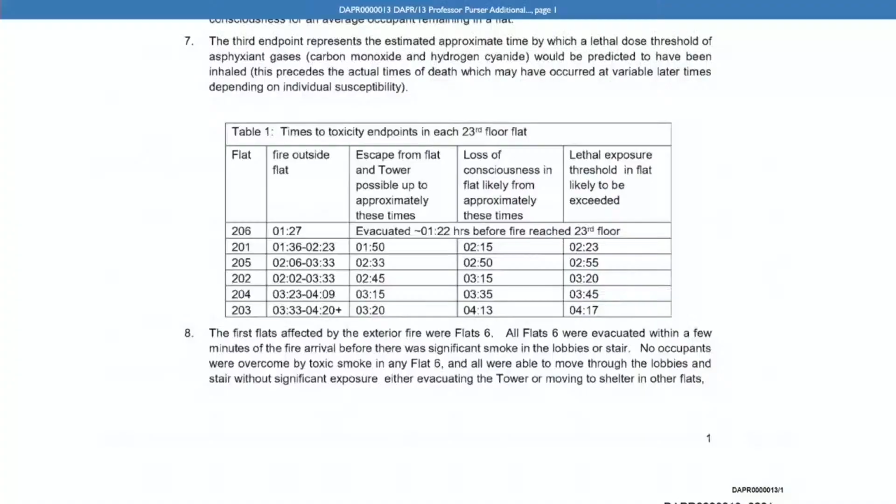I now want to ask you some specific questions about Section 6 of your report for Phase 2, where you've set out your analysis of the causes of incapacitation and death in individual cases. I'd like to begin with Floor 23. If we go to DAPR 13, we should see a table which is a summary of toxicity endpoints for each flat on floor 23, which you showed us and explained a little bit in opening your evidence yesterday. Looking at paragraphs 5 to 7, if we scroll up to paragraph 5, you'll see there that you explain the three endpoints in those three paragraphs.

Just to go through it, is it right that the first endpoint is the latest time that adult flat occupants could safely evacuate the flat? Yes. And then the second endpoint is the likely time to collapse and loss of consciousness for an average occupant in the flat? Sorry, the first endpoint was the latest time they could leave the flat and still walk down the stair, down to the ground floor without collapsing and escape from the tower.

Yep, the second endpoint, as you say in paragraph 6, is the estimated approximate likely time to collapse and loss of consciousness for an average occupant remaining in the flat. And then the third endpoint, at paragraph 7, is the estimated approximate time by which a lethal dose, a threshold of asphyxiant gases, carbon monoxide and hydrogen cyanide, would be predicted to have been inhaled. You say this precedes the actual time of death, which may have occurred at a variable time later. Yes, so that's the point where they passed the 50% threshold I discussed yesterday.

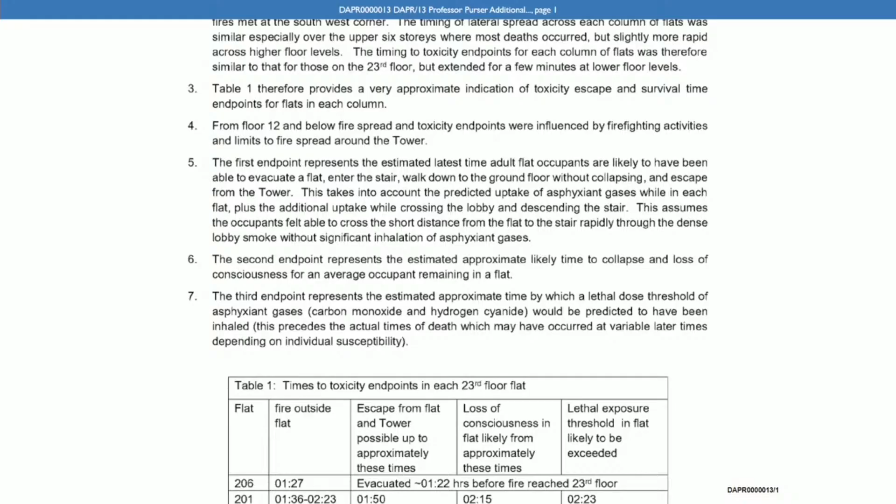Now, I'd like to start with floor 23, flat 201. You cover this at page 6 of DAPR 6. This is table 20, entitled '23rd floor occupants by flat location with summary of movements and times of escape or approximate times of death.' Correct me if I'm wrong, but you've set out each flat on each floor with each occupant in the flat, and in red type you've identified those individuals who lost their lives and the rough estimated time of death.

Now I'm going to ask you about the occupants first in 201, which you can see halfway down the screen on the right-hand side. You have a number of names: Raymond Bernard, Hamid Khani, Debbie Lamprell, Berkti Haftom, Birak Haftom, Jessica Urbano Ramirez, and Amna Idris.

You've set out your analysis for the available evidence relating to this flat from page 8 in section 6 of your report. I just want to see if I can pick through the main facts that you've referred to. Can we go to page 16 in this report? Page 16, paragraph 52, under the heading Conclusions.

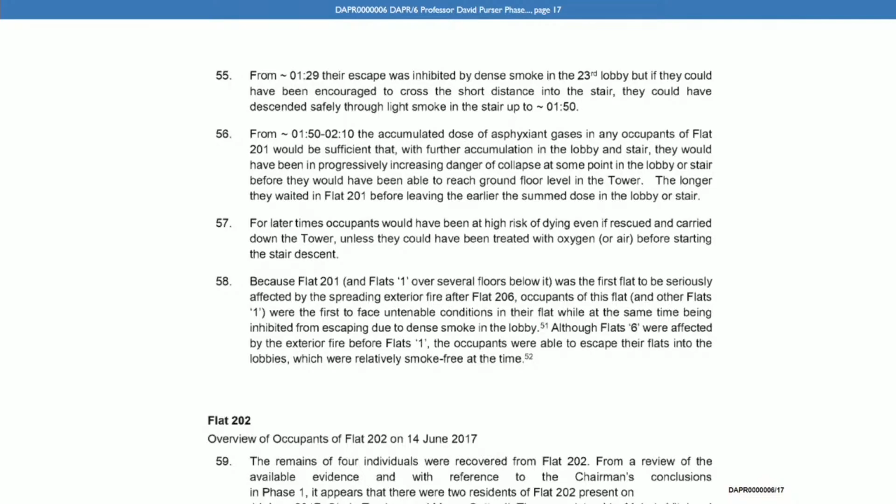Of course, but that didn't really work out very well at Grenfell. No. And then if you look at paragraph 56 at the top of the screen, you say in the last sentence, the longer they waited in flat 201 before leaving, the earlier the summed dose in the lobby or stair. Is it right that the longer the occupants remained in the flat, the greater the danger of those occupants accumulating the total summed dose?

Yes, that's right. So we're looking at the total dose, and you're building it up all the way through. So if you have a lot before you start, then once you get out, you're not going to go very far. If you leave before you've accumulated a significant dose, then you're going to be able to travel much further through whatever other conditions you meet.

Yes. And if we go back to pages 10 and 11 in this part of the report, we can just pick these points out from the paragraphs. Paragraph 23, I think you make the point that the time when Amal Ahmadin and Amaya Tuku Ahmadin left 201 is unknown, but after Fadumo Ahmed, but before about 2:12, when the accumulated exposure in flat 201 was estimated to reach a dose level predicted to cause collapse for all flat 201 occupants.

So does that tell us that Fadumo Ahmed was successful in evacuating the tower because she left earlier, but Amal Ahmadin and Amaya Tuku Ahmadin were unsuccessful because they tried to leave later? Essentially, yes. And then accumulated a dose close to causing collapse by the time they'd left the flat. As we say, we don't know precisely when they left, but it was a bit later on after Fadumo left, and we know the conditions were deteriorating quite seriously around that time. So they would have acquired a significant dose in the flat.

Yes. And just so that people can see this on the page, if we turn please to page 10, paragraph 26, you say there, the longer Amal Ahmadin and Amaya Tuku Ahmadin remained in flat 201, the greater the dose they inhaled, so that leaving any time after about 2 o'clock, they would have accumulated a significant proportion of an incapacitating dose. And then at 29, you say...

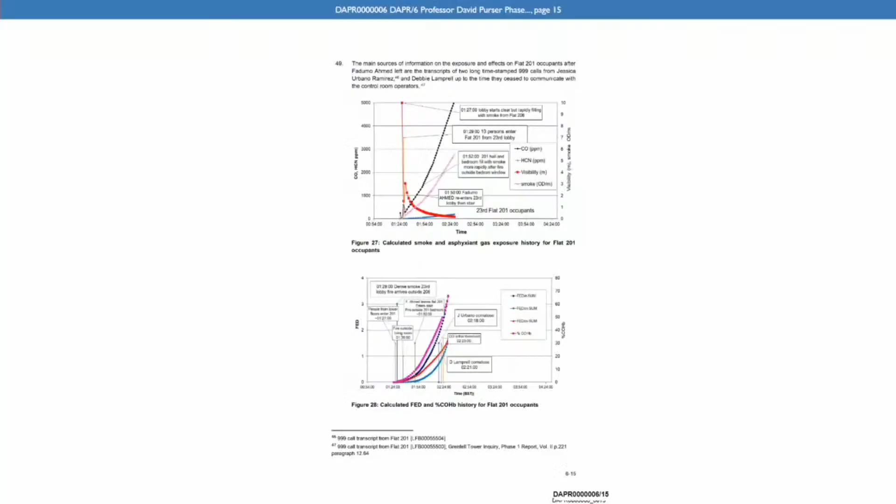If you look at figure 28, this is calculated fractional effective dose and percentage carboxyhemoglobin history for flat 201 occupants. Now, it's a complex chart, but am I right that it shows the lethal threshold for carbon monoxide reached at 2:23? Yes, approximately, about 2:23. And is it right that the occupants of flat 201 would have reached the lethal dose threshold of about 50%?

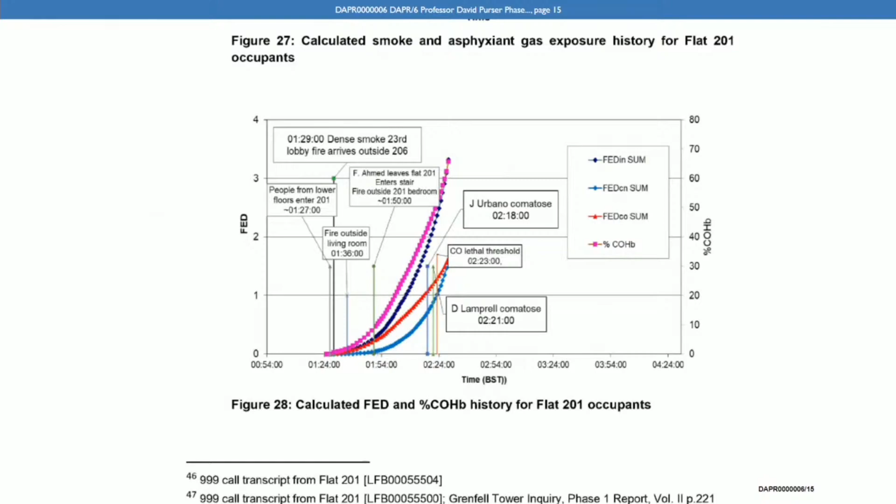Carboxyhemoglobin concentration by about 2:23? Yes. Would you estimate that the time of death of the occupants would be some time after about 2:23, therefore? Sorry, can you repeat that? Yes, would you estimate that the time of death of the occupants would be some time after about 2:23? Yes, yes. And are you able to give a specific window of time?

Right. We can give an approximate one, but as I explained yesterday, there are lots of uncertainties about the gradual slow decline once you become unconscious, and it depends on the data we have available. So for this particular case, I'm right in saying that we don't have any carboxyhemoglobin blood samples from these decedents. So we don't know whether they died at around 50% COHb or whether they went up to 90%. So it would have to be somewhere in that window.

What we do know is that, sorry, I'm thinking as I'm speaking, if that's all right. We do know that Jessica Urbano and Deborah Lamprell were on these very long 999 calls, and they became unresponsive and comatose, as you see there, at 2:18 and 2:21. So that's just before they become completely unconscious. And then shortly after that, I've estimated that they've passed the lethal threshold dose, as we just discussed, at around 2:23.

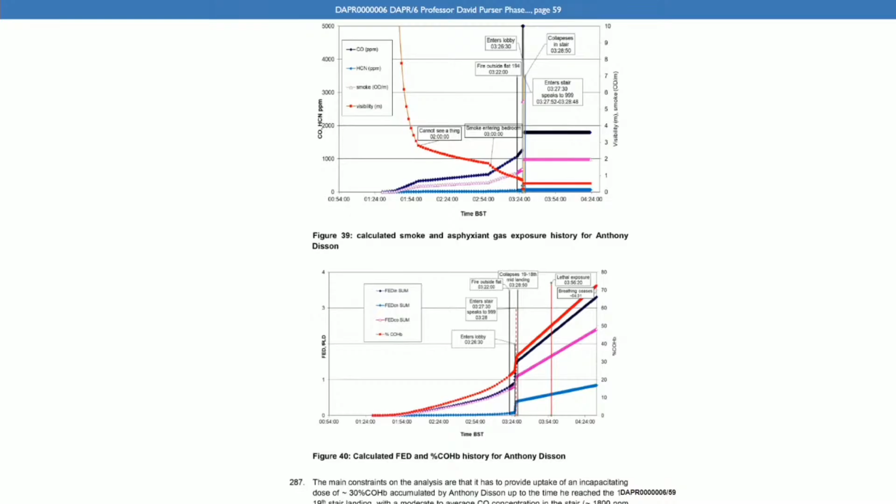Yes. I think it might be helpful also if we were to look at the floor plan chart briefly. Let's do that. MET 12593 then. Should we have that at the same time? Yes, if we can, that would be good. That's MET 12593. Page 7, we'll try page 7 first. And if we could just have that slightly enlarged. Yes, that's adequate.

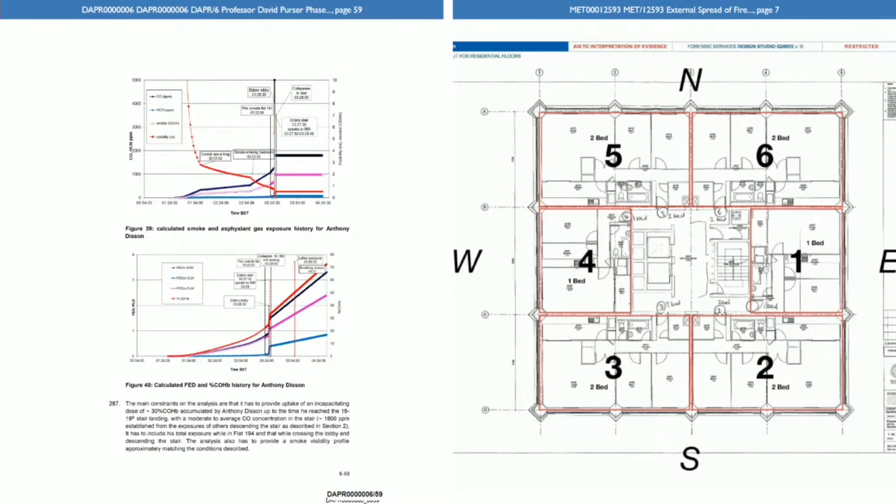So you remember I was saying yesterday that for a majority of people that I'd examined, if they left their flat where they were sheltering before or soon after the arrival of the exterior fire outside one of the rooms in their flat, and they were sheltering at that time in a different location, they really had a pretty good chance of having acquired a low dose while in the flat, and if they crossed the lobby efficiently, of making a successful descent of the stair.

So when we look at the timings for Anthony Disson, he did in fact evacuate his flat, and we have quite good data now from the 999 call in the stair. He left his flat very close to the time that the exterior fire first spread outside his flat.

So if we look at the diagram of his flat, I just wanted to point out some of these features. So obviously the fire is coming from across the west side of the tower, from the north corner. It's spread past the west face of flat 5, and it's just coming past the column there. Column B, to attack the bedroom of Disson's flat.

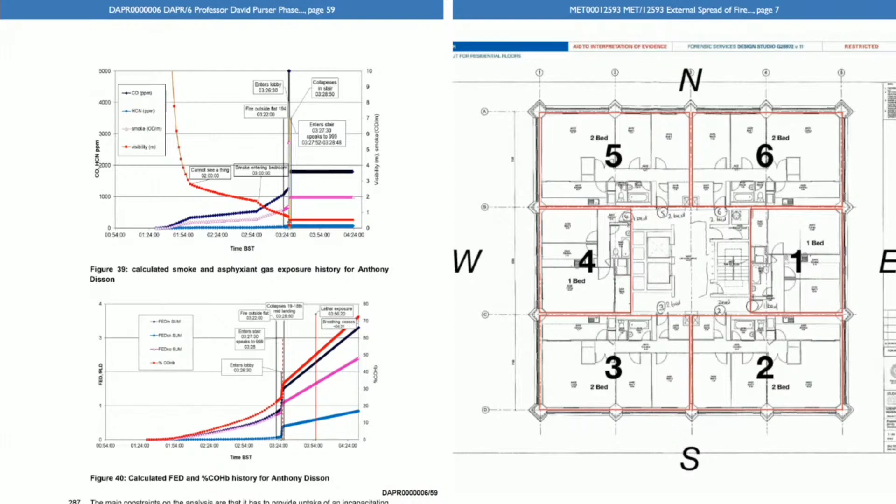Now, if we go to paragraph 295 on page 60, you say there that he inhaled a dose level of 50% carboxyhemoglobin, which represents the threshold for lethal exposure, and he'd done that by 3:56, and therefore you estimate that he died by approximately 4:31.

Just to remind me of his final dose - he died at 71%. And to confirm, you've estimated that the time of death was 4:31, very approximately.

Following prolonged exposure in the stairs, I think for more than an hour from 3:26. We get the 3:26 point higher up the page at paragraph 289. It's hard - I've rather taken this backwards, but he has 71% carboxy in his blood.

He leaves the flat at approximately 3:26 to 3:27, and then he died at approximately 4:31. Because he had to have time to breathe very slowly, breathing 1,800 parts per million in the stair for a prolonged period to have achieved the 71% at the time of death. So just to break that up into parts, at the point he enters the stair, he's obviously still mobile.

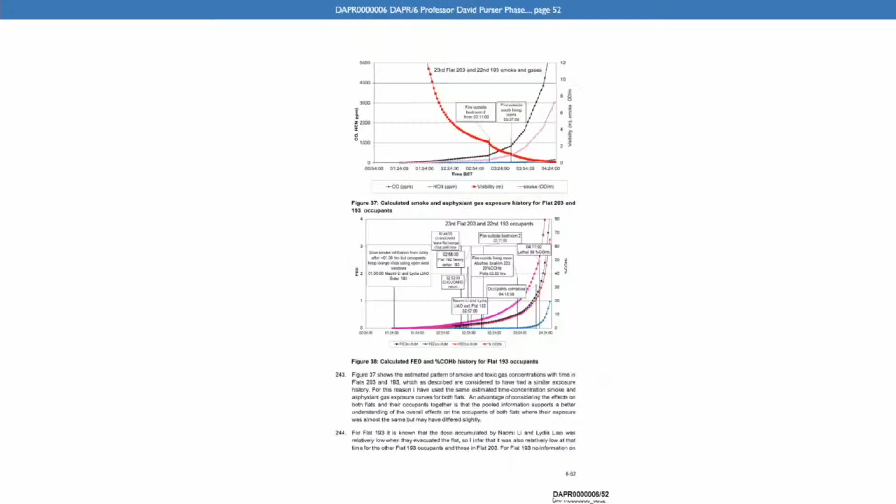If we go then, please, to page 52 in this part of the report, we have figure 38. Let's just look at that together. That shows the forward calculated uptake. Yes, it's very busy. Am I right that this is the calculated fractional effective dose and carboxyhemoglobin history for the occupants of that flat? Yes, and the one above. You've got flat 203 on floor 23 and flat 193 on floor 22.

Now, does it show that the occupants of both of those flats were likely to be comatose by 4:13? Yes. And therefore to have crossed the lethal threshold by 4:17? Yes. And I think in your conclusions, which we can find on page 54, let's have those up at the same time, please. Page 54, paragraph 254. Yes, I'll read it aloud.

You say, by around 4:17 to 4:20, the occupants are likely to have inhaled a lethal dose of asphyxiant gases. As stated, since the remains of the flat 193 occupants were located in the southwest corner of the living room, it is likely that they would have been subjected to some heat exposure after the fire reached the south side of the living room. However, due to their prolonged exposure to smoke and asphyxiant gases, it is likely that the flat occupants would have become comatose, then died from inhalation of toxic smoke and due to the inhalation of asphyxiant gases, especially carbon monoxide, with contributory effects from other toxic gases, including hydrogen cyanide.

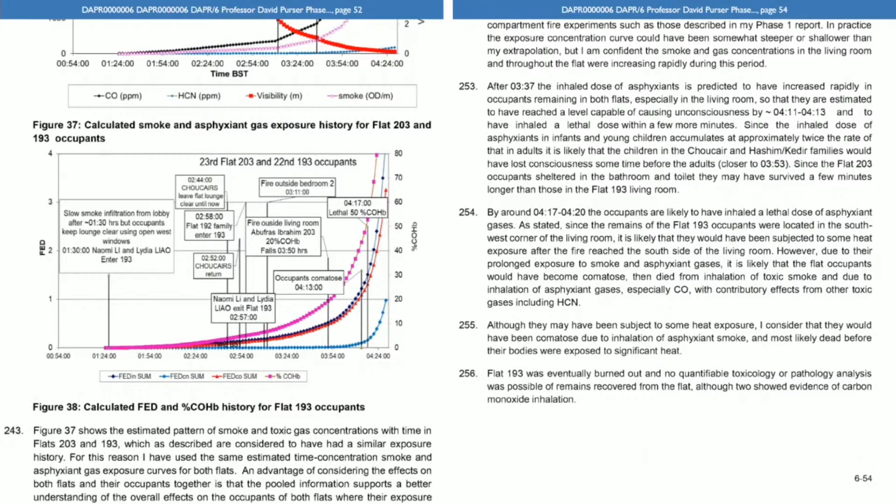Now, moving away slightly from that particular point, I'll read the reference in the record, I don't need to show it to you. There's a transcript of a call from Nadia Choucair that you've referred to, a 999 call which connects to British Telecom at 3:14, in which Nadia Choucair says, 'My daughter's unconscious, she's dying.' And the reference for that is COR 401081.

Now, the question is, taking that into account, 3:14, is it possible that the child's time of death may have been earlier than the range 4:17 to 4:20? Yes. No, I hadn't been aware of this particular call up till recently. I was in your report, I believe. I've missed that, I'm sorry. But that seems quite early to me, because we knew Lydia and Naomi had successfully left the flat at 2:57.

They'd been, of course, they're adults. And, of course, the other factor, which you may be about to raise with the Choucair family, is that they had attempted previously to escape. I'm right, aren't I, in saying that? Yes, some had, yes. So they'd left the flat earlier on, and they were gone for about 8 minutes. And so I estimate that in that 8 minutes they may have travelled down the stair several floor levels and then turned round and come back again. And then they re-entered the flat.

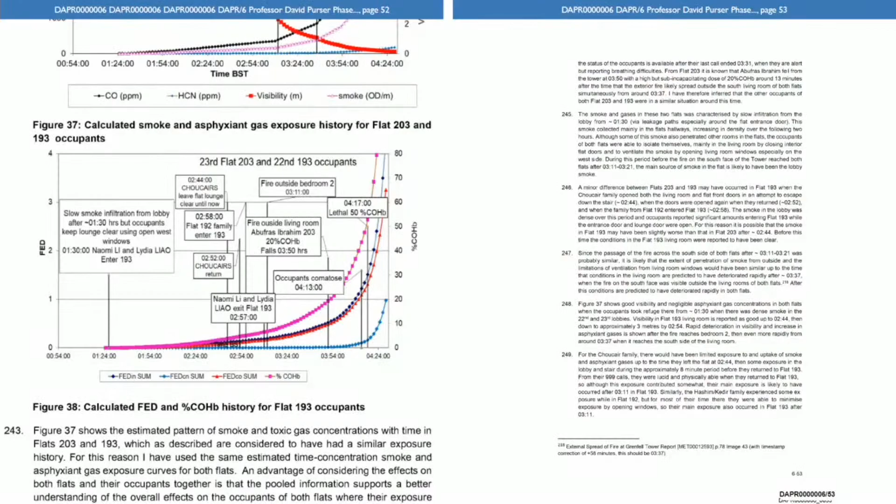Yes, thank you. There would have been limited exposure to and uptake of smoke and asphyxiant gases up to the time they left the flat at 2:44. Then some exposure in the lobby and stair during the approximate 8-minute period before they returned to flat 193. From their 999 calls, they were lucid and physically able when they returned to flat 193.

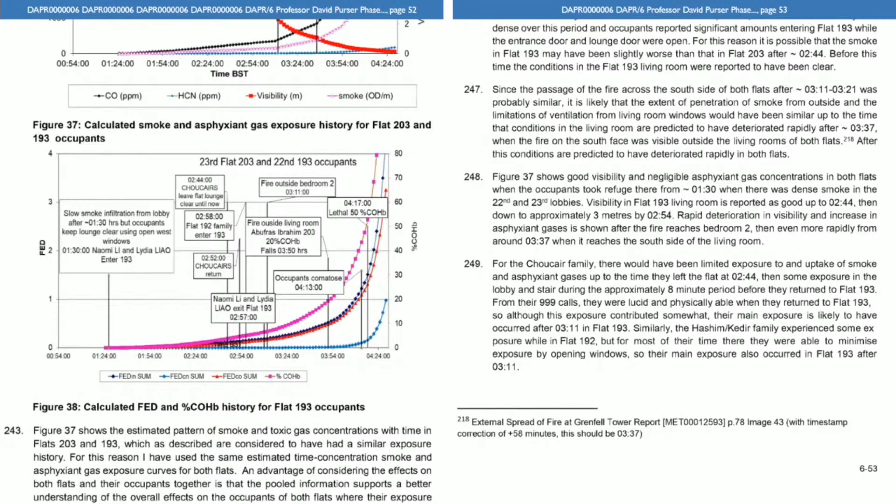So at that time, the adults were still in a good condition, but of course they had accumulated a certain preloaded dose in that activity period. And you go on to say they seem lucid and physically able on their return, and their main exposure is likely to have occurred in flat 193 itself, after 3:11. Now, my question, Professor, is would their time in the lobby have contributed to the accumulation of the fractional effective dose of carboxyhemoglobin?

Well, this is an interesting point. So we're talking about flat 203 here, aren't we? Yes, flat 3. So I would not expect them to have spent very long in the lobby because of the distance, looking at our diagram. The distance from the front door of flat 3 to the stair door is quite short. I think it was actually 6 metres.

But let's have it up so that people can see what you're explaining. MET00012593, please, page 7. Okay, so somebody's written number 3, with a circle. Yes, that's the front door of flat 3. And then just to the right of that, up a little bit, we can see the curve of the door to the stair, leading to the stair, and it's a very short distance to travel.

So I would have expected them to have spent seconds negotiating that distance, and possibly holding their breath while they did it, because we know that the conditions are bad in that lobby. So I would not have expected them to inhale a significant dose while crossing that lobby. However, in the stair, we don't know, but my understanding - I'd have to reread their witness statements again - I certainly formed the impression that they must have got into the stair, and from the 8 minutes, that would have given them time to have descended quite a number of floors, turned round and reascended in the stair, and had quite a significant exposure while in the stair. So I think that's where their main exposure would have been, in the stair.

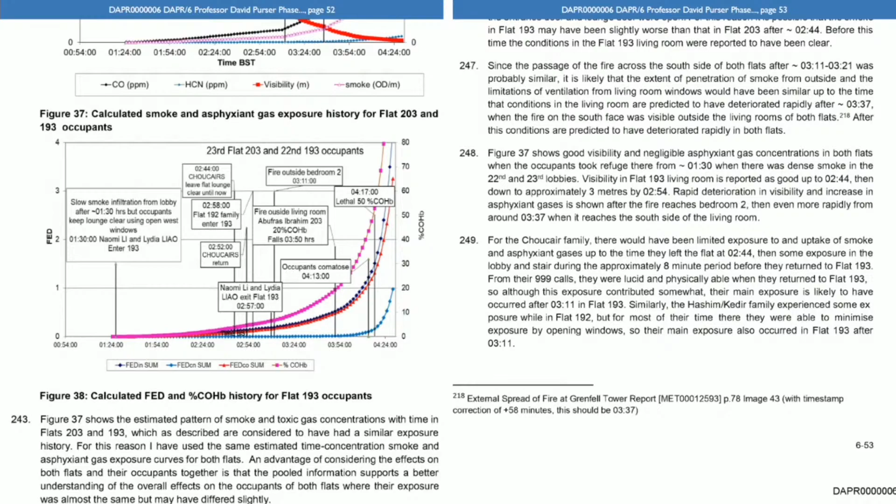Now, if we go, please, to page 43 and look at paragraph 202, and over the page to page 44, paragraph 204, it runs down that part of the page, and over the page, under the heading Analysis of Uptake of Asphyxiant Gases, and I'm summarising what you find here, you identify the conditions in the bedroom in which the Kedir family were sheltering in flat 192 deteriorated more rapidly from around 242. You say that in 202 in the middle of the paragraph.

Yes. And that the conditions would have deteriorated further at around 255 in the next sentence, yes? Yeah. And that the final roughly 15-minute period in the flat is likely resulting in them inhaling a significant dose of asphyxiants before moving to flat 193. Yes?

Where was that? Well, you find that, I think, in paragraph 202 and 203. It's a combination of the both, I think. It's hard to digest text quickly, I'm sorry. I know, and take your time. Conditions deteriorated more rapidly from 242.

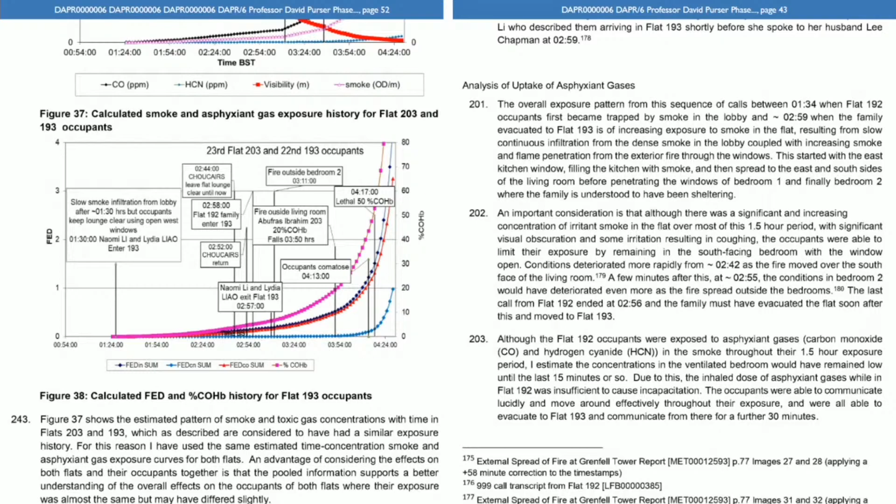I think the best place to find this, to be frank, Professor, is at the top of page 44 in paragraph 204, where you say, although the flat 192 occupants are able to evacuate the flat at about 256 to 259 and cross to flat 193, they are likely to have inhaled a significant dose of asphyxiants before leaving flat 192. Right, yes, sorry.

So as I was saying half an hour ago, there's a real issue here with these flats too. People were able to minimise their exposure for quite some time by sheltering in the bedrooms, as appears to have happened here. But it looks as if they were still in the flat after there was quite considerable spread of fire, even outside the bedrooms, from what the paragraph we've just been perusing says. So they were still very active, able to make the transition without great difficulty, in a good condition at the time, but they would have accumulated some degree of asphyxiants before they left flat 192, possibly more than Lydia and Naomi would have been doing in 193 and the Choucairs before that they did their stair.

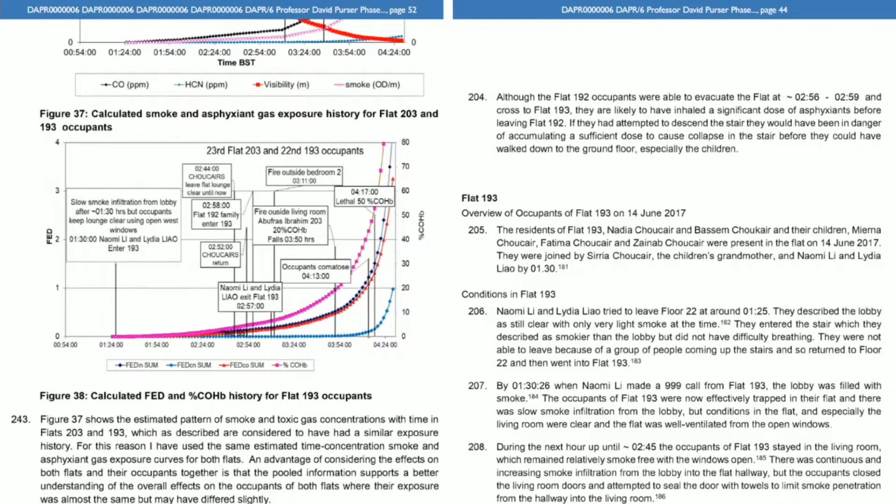Now, you say, in the next sentence, if they had attempted to descend the stair, they would have been in danger of accumulating a sufficient dose to cause collapse in the stair before they could have walked down to the ground floor, especially the children. Yes. Are you able to quantify the accumulation of asphyxiant gases and risk of collapse further than you have?

Well, it's similar to what we've been discussing yesterday, that I think from memory, the dose you're going to accumulate as you walk down the stair with 1800 ppm from a high level is something like 20 or so percent carboxyhemoglobin you're going to add to whatever you start with. And if you start with more than about 9 or 10% before you set off from your flat, then you're in danger of getting into trouble before you reach the bottom of the stair.

And from the description of the timings of fire spread and the activities of the occupants, I feel they were on the cusp of this kind of transition point, where if they'd remained much longer, they would have pre-accumulated too big a dose to allow headroom for them to have accumulated the further dose as they walked down the stair.

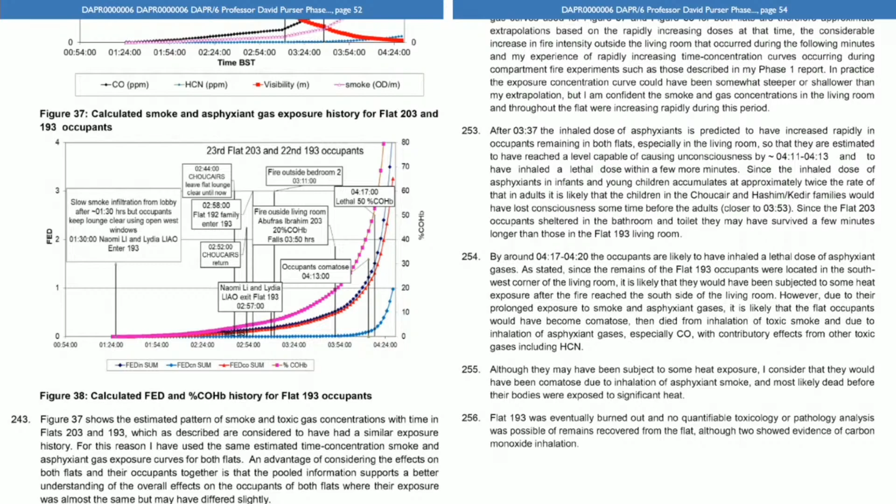Yeah, so here we're talking about the living room because we're in 193, so yes. Now, could the times of death of the children have been earlier than 4:20? If we go to table 21 and recorded here in paragraph 254, so 4:17 to 4:20, could those times for the children be earlier than that window because of their age?

Yes, I think we can estimate that there would have been a shift. I know it's difficult to quantify, but they would have expected to be earlier than the adults. If you like, the probability is that the children would succumb before the adults, be overcome before the adults.

And I can tell you the age for Zainab, because it's in the phase 1 report and therefore in the public domain, but it was 3 years old. I thought it was 3, yes. So she was probably carried when they went down the stair, but even so, she's still inhaling significant amounts of these gases.

But just to be clear, you say that it's likely that they would have died earlier than the window of 4:17 to 4:20, but you can't say how much earlier. Not really, but yes, earlier, some minutes earlier.

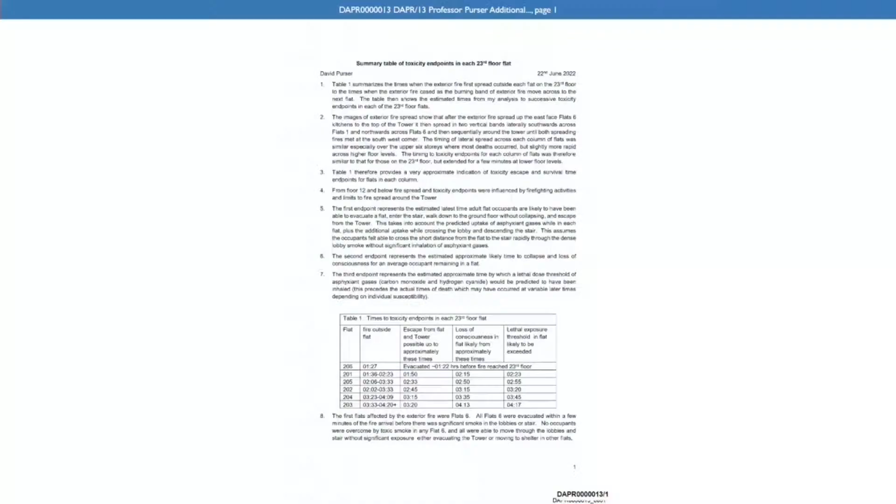There's the table. So we're talking about—well, this is for flat 202. So we're talking about flat 192, aren't we? Yes, okay, so flat 192.

And the pattern of fire spread and the timing of it at these upper floors was pretty close, with the slight caveat that as you go down, you sort of buy the odd minute or two floor by floor as you go down.

So I've got a figure there of about 2:45—that's where I got my 2:45. Yes, I think that's a good indication. Okay, so that's before the 2:58, which was the last time of the call.

Yes, so by the time of that call they're already close to unconsciousness—so that's too late by then. Yes, really. Thank you.

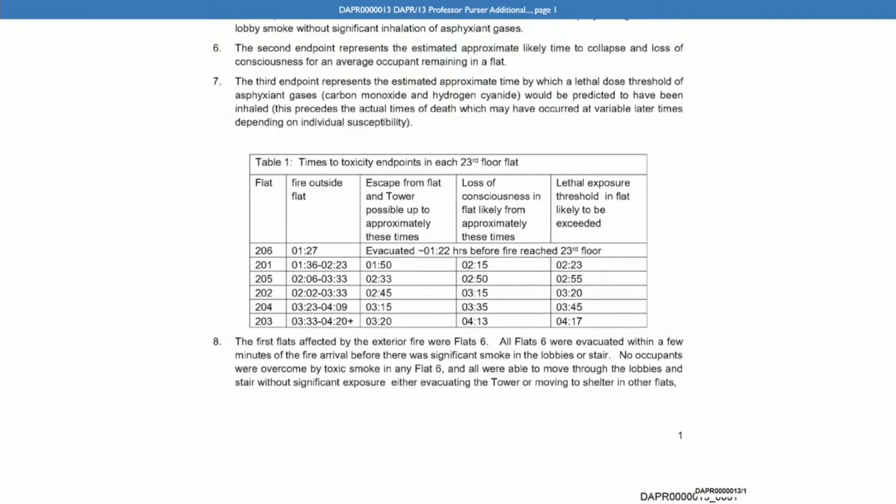Then let's go, please, to the Belkadi family in flat 175 on floor 20. For that, please, let's turn to page 88 in part 6 of your report, DAPR 606. The overview at paragraph 486 says: the Belkadi family, Omar Belkadi, Farah Hamdan, and their 3 children lived in flat 175. They were present on the night of the fire, and we can again run through the various facts which pertain to that particular family.

Is this floor 21? I think I said 20—it's 21. If you go, please, to page 91—well actually, it is floor 20, 20. I'm sorry, it is 20, it is floor 20. My fault. 20, sorry, yes, I miscorrected myself. It's floor 20.

If we go, please, to page 91—well, we can pick this up I think a bit higher up on page 88 first, which we have. You say in paragraph 487 that the family remained in flat 175 until firefighters attempted to assist their evacuation from the flat at approximately 2:19.

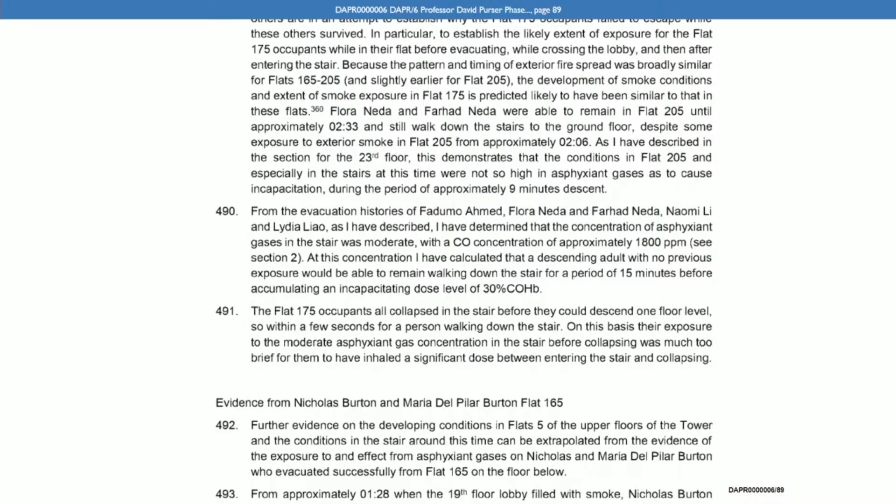If we then go, please, to page 100, and go to paragraph 545, you say there, under your conclusions, that Farah Hamdan, Lina Belkadi, Omar Belkadi, and Malak Belkadi all experienced a similar exposure to toxic smoke and asphyxiant gases sufficient to cause collapse almost as soon as they entered the stair, and then death on the stair after a further exposure. They were not exposed to significant heat while in the flat or lobby. The minor heat damage is likely to have occurred after death, before the bodies were recovered from the stairs.

They collapsed almost immediately after entering the stairs, so they had already inhaled an incapacitating dose of asphyxiant gases by this time, approximately 30 to 40% carboxyhemoglobin, while in flat 175 and the 20th floor lobby. Some of this was accumulated while in flat 175.

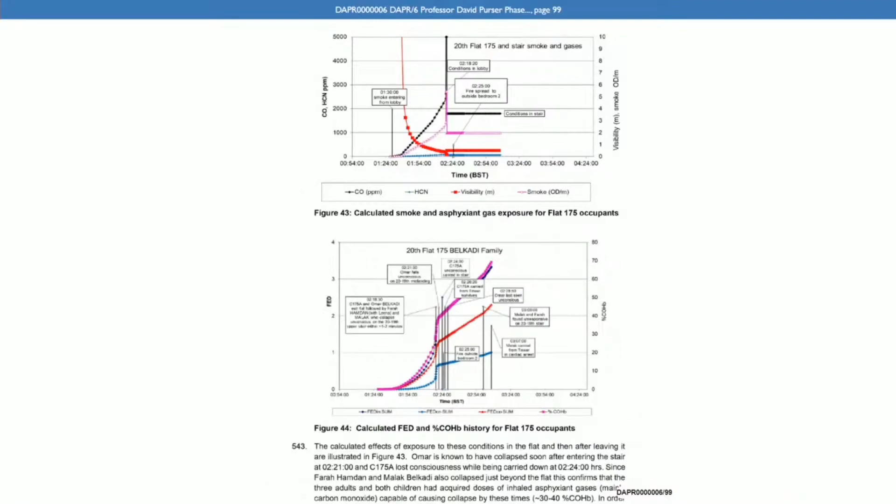Now, against that background, can I ask you to look, please, at figures 43 and 44, which we will find on the next page. Sorry, page 99, apologies, the previous page. There it is, 43 and 44, which is the calculated smoke and asphyxiant gas exposure for flat 175 occupants in 43, and in 44 the calculated FED and percentage carboxyhemoglobin history for those occupants. We may need to have those expanded a little bit so that they're clear.

Now, looking at those figures, I have a question now. Is it possible that the Belkadi/Hamdan family could have successfully evacuated flat 175 if they'd left earlier than 2:17, which is your time?

So they left at 2:19. We established that earlier, didn't we? Yes. And you're asking me - sorry, it's hard to keep up with all this. So why do you pick 2:17? Because that's the last time they called, at 2:17. And we get that from paragraph 506, which I showed you.

This Belkadi family history is really quite a complex one, as I'm sure you appreciate. We've covered a lot of ground in the last 5 minutes. I know. So it might be helpful if I just explain how I approached this. So basically what I'm saying is...

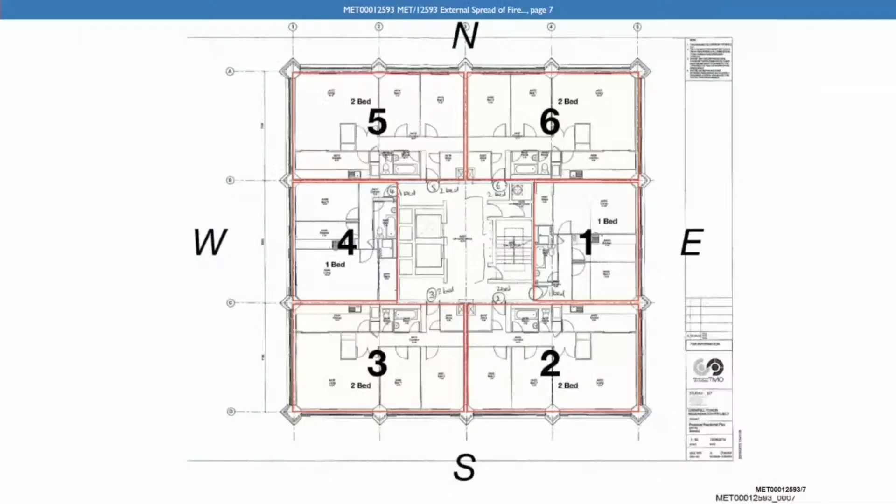Let's look at MET00012593, which we looked at before, page 7. We looked at Tony Disson's flat 194, which was a flat 4, and we looked at flat 3. We're now looking at 175, a flat 5, and I think you can identify the front door there. Is that more or less?

Does that present more or less difficulty to cross the lobby than Tony Disson's? Well, it's very similar, as you can see, because the 4 and the 5 are quite close together. I mean, the absolute distance isn't enormous, but it's a long way to go under these circumstances, and it's the complexity of the route and the danger of getting confused and lost on the way.

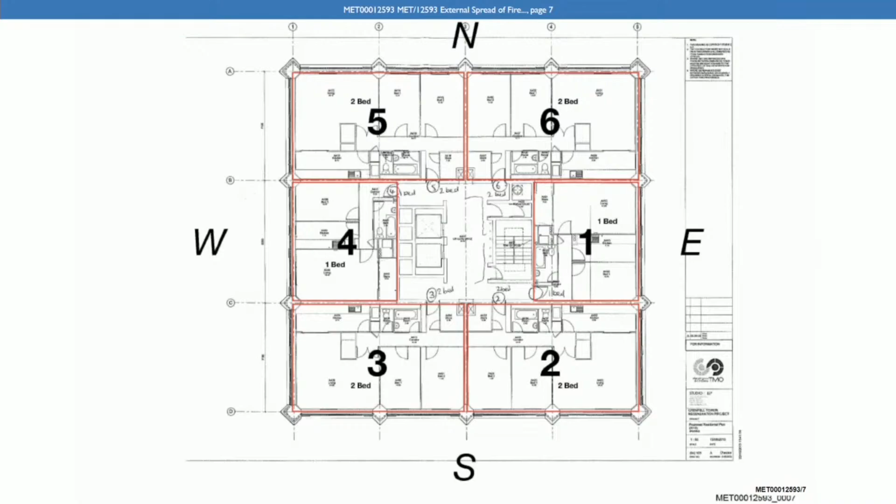Now, moving on, can we get back to your Section 6 report, please? DAPR 606, page 99, paragraph 543. You say there, in the third line, since Farah Hamdan and Malak Belkadi also collapsed just beyond the flat, this confirms that the 3 adults and both children had acquired doses of inhaled asphyxiant gases, mainly carbon monoxide, capable of causing collapse by these times, 30 to 40%.

And then you go on to say, two-thirds of the way down the paragraph, after they are all likely to have become unconscious at 1:32 - that must be a mistake. I found that yesterday. It should be 2:32, shouldn't it? Thank you, yes, that corrects that.

There would have been a slow, gradual uptake of carbon monoxide on the stair, with a slowly increasing carboxyhemoglobin, until they had exceeded the lethal threshold, about 50% carboxyhemoglobin, around 2:49, based on an estimated average 1800 ppm CO in the stair. Is that correct? Yes, that is correct.

And is that a window of time? Can you give an estimated window of time? Well, that's a point in time. So this is for the time to pass the lethal threshold. I would probably put that time fairly tightly around there. Obviously there's some uncertainty, a few minutes either way, but to get to 50%, you might add or subtract 3 or 4 minutes either side of that. But that's a good figure to work to, I think, 2:49.

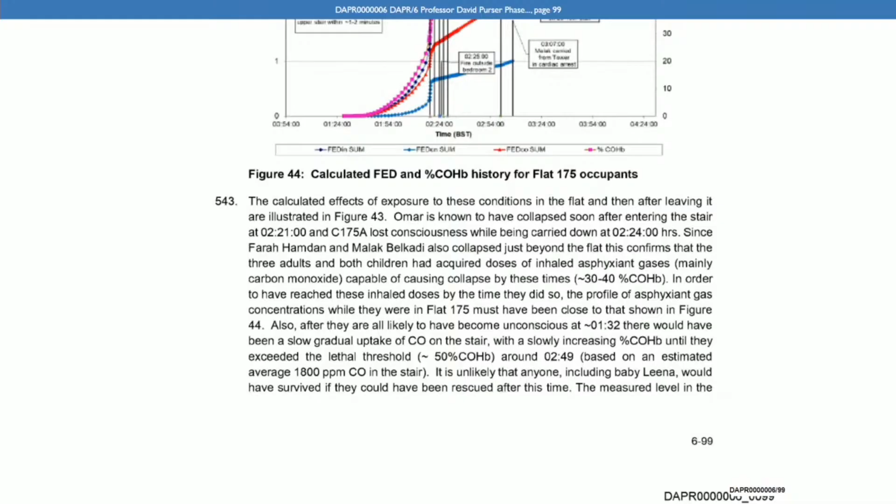That's very helpful. Can we then go to table 23, please, on page 85, which shows this family in flat 175. It says there that all the times are to stair at about 2:20. Yes, that is, just to be clear, the time they enter the stairs, not the time of death. And you would add the time of death, as at 2:49 - something like that, the time at which they exceeded the lethal threshold.

Now let's turn to another flat on the same floor, flat 173. This is Khadija Say and Mary Mendy. Can we please turn first for them to page 101, flat 173. And you say under the overview of occupants that Mary Mendy and her daughter Khadija Say were both residents of flat 173 and present on the 14th of June 2017. They remained in their flat until sometime after 3:30 when they tried to evacuate.

And then you cover the conditions at paragraph 551 and following. I'll just pick through these, as I have with the others, to pick up the time marks. We start with Khadija Say's posting on Facebook at 1:49 reporting a fire in the block. You say that. And if we go to page 102, please.

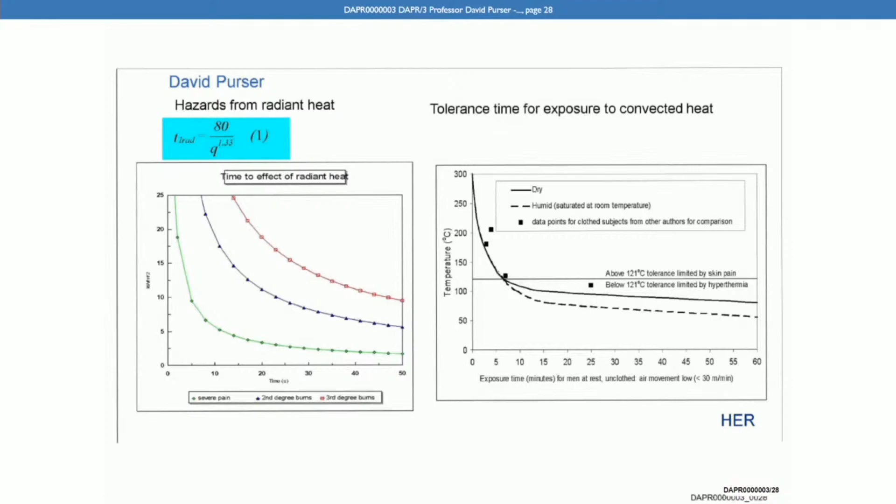Let's then turn to a different flat, different floor, different occupant. Joseph Daniels, flat 135, floor 16. Can we please go back to your report, at section 6, page 126. Now, Joseph Daniels lived at flat 135 on floor 16 with his son, Sam Daniels.

Can we please go to page 126, paragraphs 683 to 686? So foot of page 126, 683, and just remind yourself of what you say there. And then turn the page, yes please, to 127 and read down to 686. Yes, I recall this, yes.

Carry on. Thank you. And then if we go to page 128 and look at paragraph 691, under conclusions, you say there - you look at your conclusions, and you say Joseph Daniels remained in flat 135 when his son Samuel Daniels left the flat, entered and crossed dense smoke in the 16th floor lobby, and then entered the stair in an attempt to find assistance to evacuate his father. Samuel Daniels stated that he left the flat entrance door open when he left the flat so that his father could follow him. If the door remained open for several minutes, flat 135 would have filled rapidly with very toxic smoke from the lobby. When firefighters checked, they found the door shut, so it's likely that Joseph Daniels shut the door before sheltering in the living room.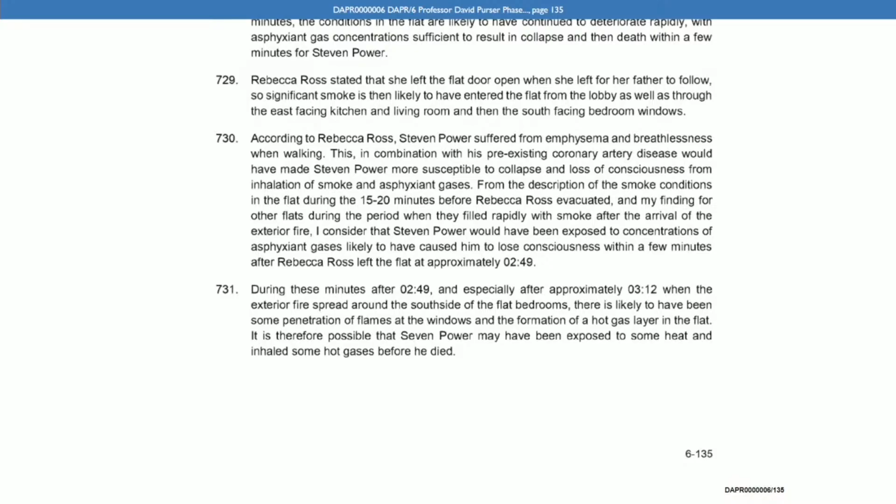Now, can we go, please, to DAPR 605?

This is back to a part of your report we were looking at yesterday. DAPR 605, section 5, page 131. This is where you deal with Steven Power in this part of your report.

I think this is a particular behavioural case, in that throughout this period Rebecca was quite keen for them both to evacuate the flat from an early stage, and he was very reluctant to do so.

No, my question is not about the social or wider effects, but the irritant smoke itself - what effects would that have had? Behaviourally, it would further deter any attempts he might have considered in escaping. It would make things distressing and uncomfortable.